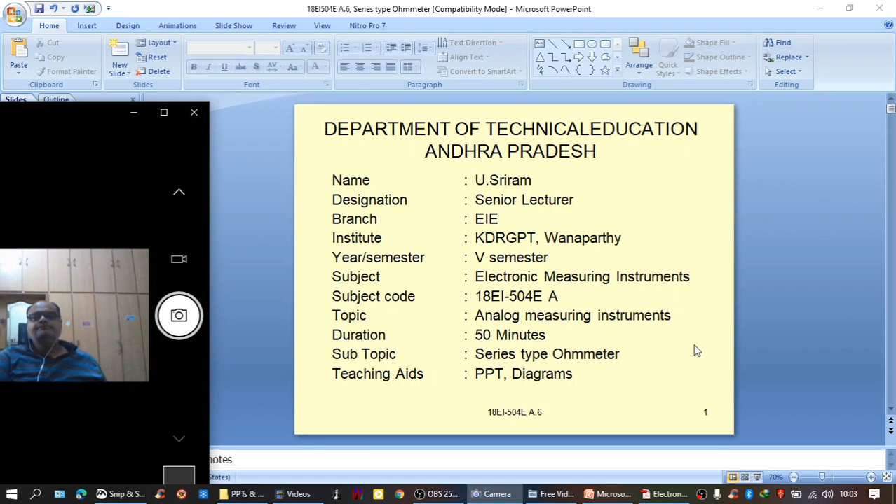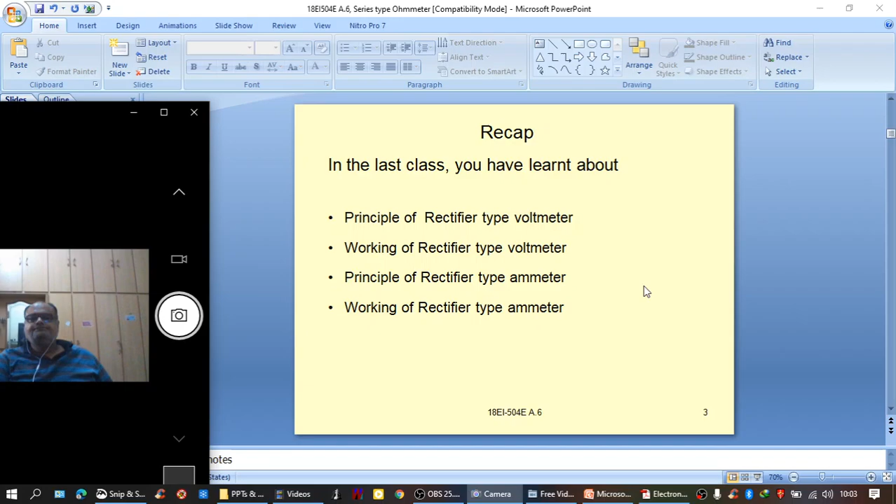Till now we discussed the principle of rectifier type voltmeter, working of rectifier type voltmeter, principle of rectifier type ammeter and working of rectifier type ammeter. Now we will see the next topic, that is series type ohm meter. We will see how the series type ohm meter is constructed, and what is the design procedure for a series type ohm meter.

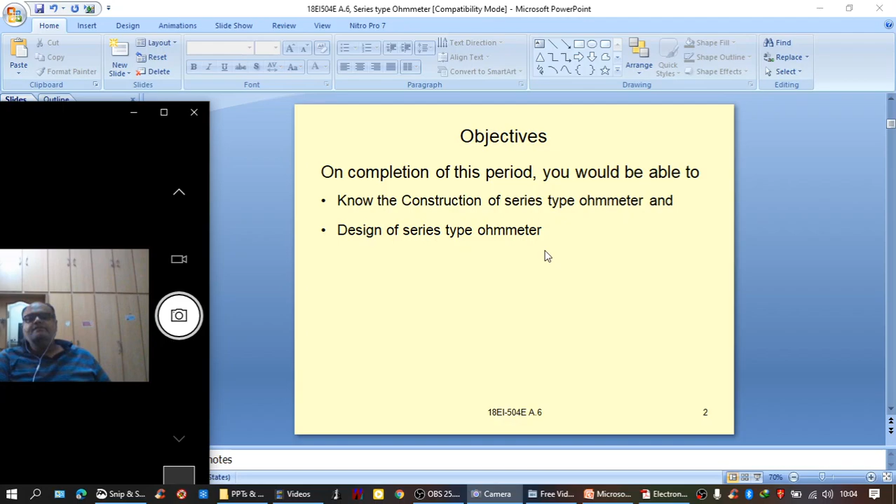Basically, similar to a voltmeter or an ammeter or a rectifier type meter, the ohm meter also makes use of the basic PMMC movement as the primary instrument. Additional circuitry is added to the basic PMMC movement to convert it into an ohm meter, that is, a meter used for the measurement of resistance.

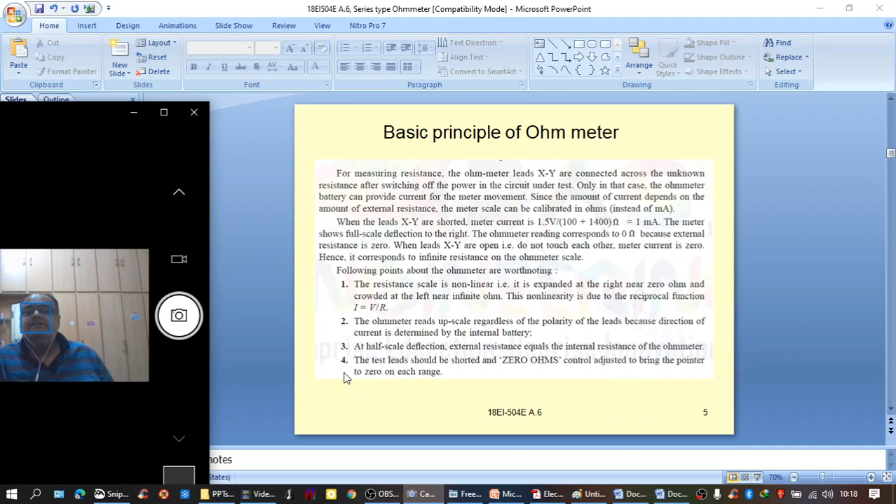The resistance scale is non-linear, that is, it is expanded at the right near 0 ohm and crowded at the left near infinite ohm. This nonlinearity is due to the reciprocal function, that is I is equal to V by R. We know that the parameter that is responsible for the deflection is current. Either it is ohmmeter or ammeter or voltmeter or rectifier type voltmeter or any other meter, when a pointer is deflecting, the movement is caused by the current flowing through a coil. So current is responsible.

Now here how we are getting current? We are getting current here by a factor V by R, where V is the battery voltage applied in the ohmmeter and 1 by R is the factor that is affecting the value of current. And 1 by R is always a nonlinear quantity. Say for example 1 by 1 is 1, 1 by 2 is 0.5, 1 by 3 is 0.33, 1 by 4 is 0.25, 1 by 5 is 0.2. Just see here, starting from 1, 0.5, 0.33, 0.25 and 0.2. So the readings are not uniform, are not linear. They are not spaced linearly.

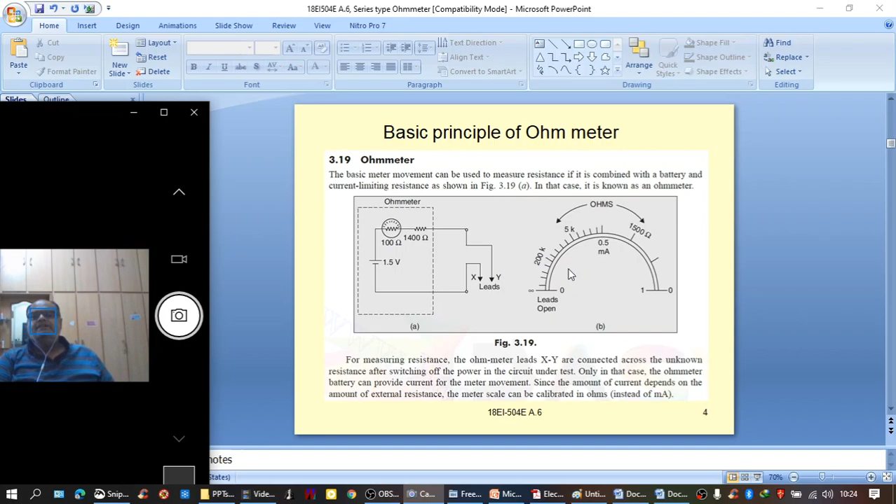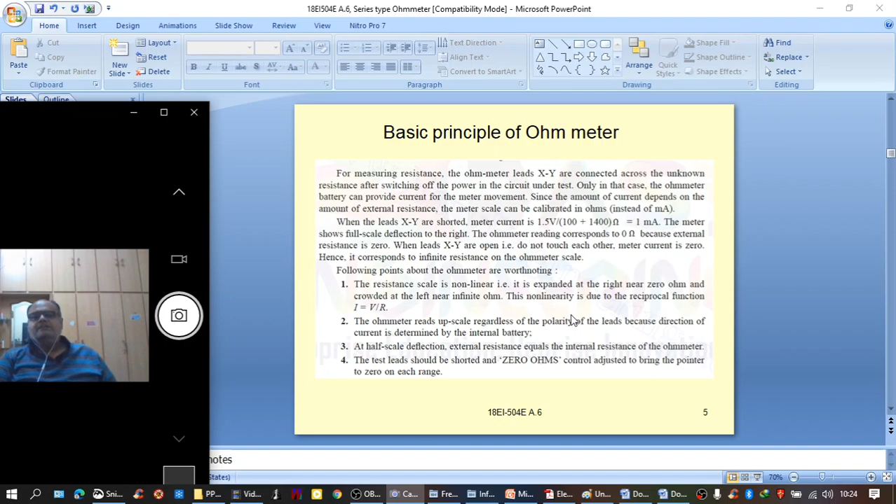Third one, at half scale deflection, external resistance equals the internal resistance of the ohm meter. Here, at half scale deflection, that is at this point, the resistance would be exactly equal to the internal resistance. That is this combination, 100 plus 1400, that is 1500. So when you connect another 1500 here, 3000 will be the total resistance. Current would be 0.5 milliamperes, and 0.5 milliamperes corresponds to the center position, that is half scale position. At half scale deflection of the pointer, the internal resistance would be equal to the unknown resistance.

And the fourth one, the test leads should be shorted and 0 ohms control is adjusted to bring the pointer to 0 on each range.